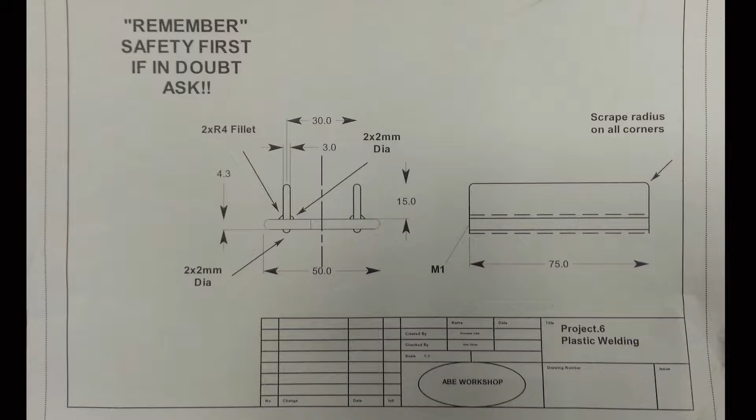Can you understand what I'm saying about reading the drawing? You understand what that 2 by 2 is? That 2 by 4? No? That is the type of welding rods we use.

In plastic welding, the welding rod is designated by the end section. Okay, now have a look at the end sections on that - there's a 2mm and a 4mm fillet. You can pass that around, have a look at that, and you'll see what I mean. What else does it say that we've got to be looking at?

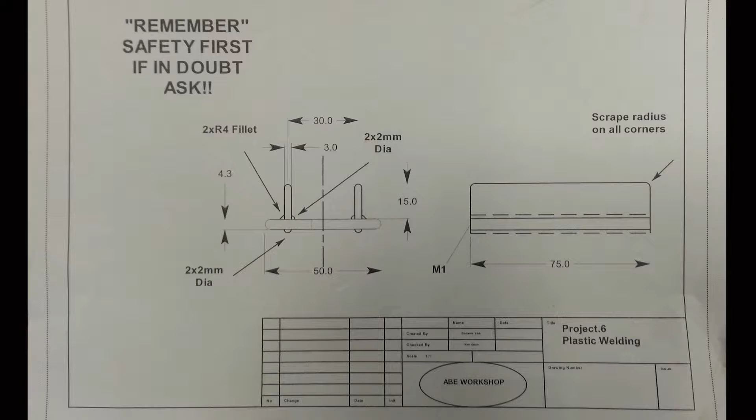Big black writing there - scrape radius corners. Did you just pick that up? Right, so what that means is we have to round all the corners on this material before we actually put it together. Now to do that, it's pretty simple.

All we need to do is use the edge of the rule. This is one time where we can use a tool for what it's not designed for, because this is hardened steel, that is soft plastic, it's not going to damage the rule. So just a scraping - just be careful that you do not get carried away by scraping in the centre, because you'll take too much off in the centre and not on the edges. Okay, just scrape both sides of it, make a nice little round there.

If you want to go a little bit further, you can use a little bit of wet and dry and give that a good sand up with your wet and dry.

Righto, there's another thing we've got to look for before we start. On the back of your plastic, on all plastics that you buy, it has a protective film. Please make sure you remove the plastic film before you start welding. That will be on both of them, on the little ribs, as well as your base plate. Looks like that's off that - yep, that's off.

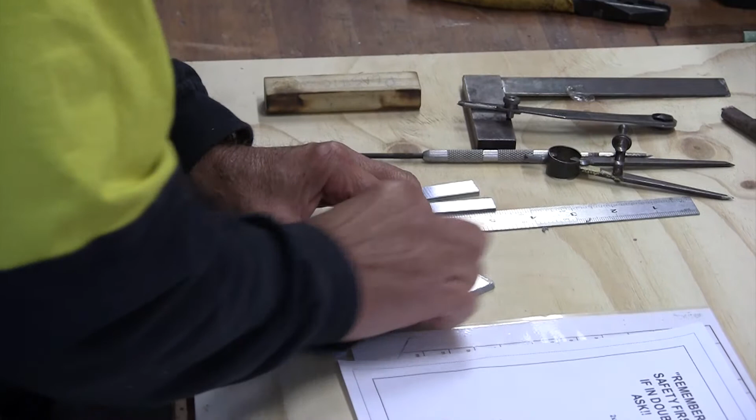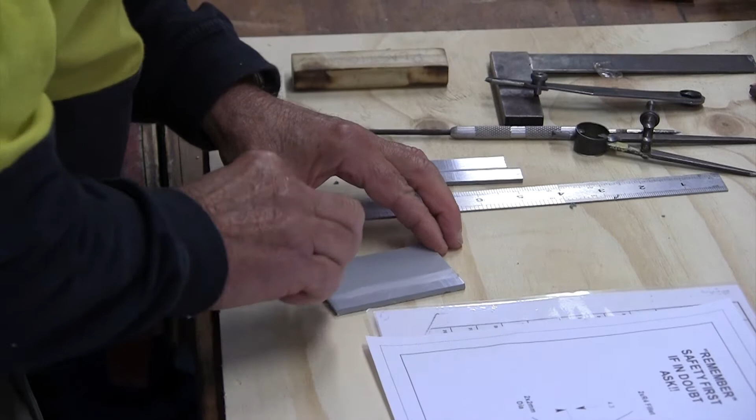Now, because there's a protective film on there, that will leave a little bit of grease - contaminant - on your surface. So where you're going to weld, just get a little bit of wet and dry paper and give that a bit of a clean up, on both sides. All right, we're ready with that?

Okay, now we'll just put that aside and I'll just go through the OH&S of our plastic welding. Righto, now do you remember your school days - the two different types of plastics? Yes? What were they? Thermoplastics and thermosetting. Yep. Your thermoplastics are like what? An example.

Your PVC, acrylics, polypropylenes, ABS - they're all what they call thermosoftening. Your thermosets are more like your Bakelite, your fiberglass resins. Once they're cured chemically, they just do not move anymore. But with your thermosoftening plastics, we can heat it, bend it, heat it, bend it. It has a memory.

Why can we do that? You remember from our chemistry days, the valency bonds with the atoms? It has a long chain valency bond, so that means with a small amount of heat we can bend it, reheat it, bend it back again.

And that enables us, with a small amount of heat, to fuse two bits of material together with a welding rod, so we don't need a great deal of heat like we do when stick welding. In stick welding, we're getting the temperature up to about a bit over 2,000 degrees C. With plastic welding, we're looking around about 350 degrees C. So that's the reason why we can plastic weld.

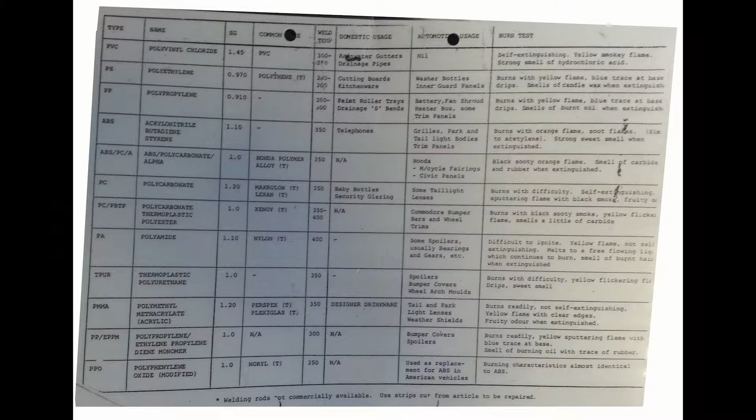So if you're unsure of your material, you can check what it is by a simple burn test. There are charts like this around that give you where the material is used, what the heat setting of your gun is, and what the burn test is on the side there. For an example, your PVC - when I burn it, it's self-extinguishing yellow smoky flame and a strong smell of hydrochloric acid.

We'll just do a little burn test here so I can show you. I've got a tray there with water in it, so if any drips, it's going to drip into the water. So the yellow flame, black smoke, self-extinguishing, and that does smell of hydrochloric acid. Did anybody get a whiff of that? No, well I don't really want you breathing it, but it's not good.

But you can do a burn test. Now if I wanted to do ABS, it burns with an orange flame, there's soot flakes that come off it. It's similar to the acetylene and has a strong sweet smell when it's extinguished. So you can do a burn test and that will tell you what type of plastic it is you're trying to weld.

Now in this industry, they use a lot of plastics on your motorbikes, fairings, in cars. How much percentage of a motor vehicle these days do you think is plastic? Yeah, that's a huge amount, probably 30-40%.

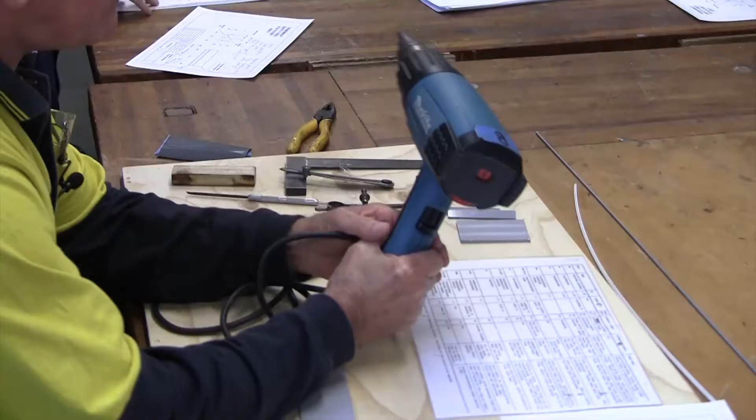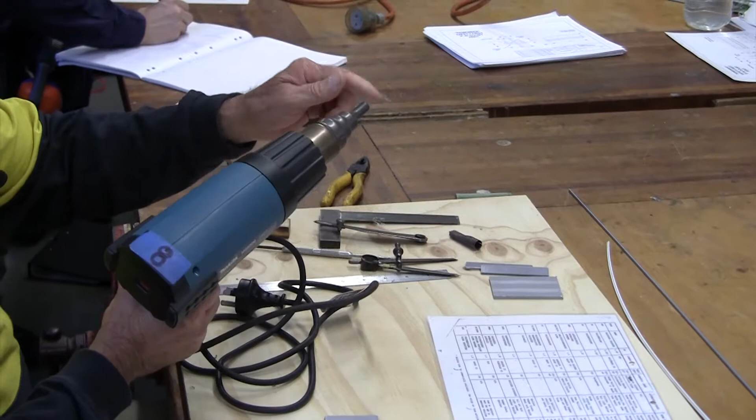Now the machine or tool that we use is a heat gun. Now what the heat gun is - it has an electric motor, a fan and a heating element. The electric motor drives the fan, which forces air over the heating element, then it comes through this restricting nozzle at the end of it. This will get up to about 600 degrees C when I put it on maximum.

We'll put it on about 350 degrees, which is number 8 setting. There is your on-off settings on the back there. We'll be putting it on number 2 - that's your speed of the fan. If I was working outside, I'd put it on a higher fan setting, but number 2 on the inside is fine.

Now, when it goes through the front section here, that gets extremely hot. If I was to put my hand on that, my hand would stick to it when it's hot.

Right, now I've gone through and explained the process and the machine we're using. What is the hazard of that tool? What other hazards have we? Electricity, excellent. What else? It's a bulky tool, it's like a big tool. Cumbersome, yeah.

Put it all down, this is all your OH&S of it. What else? The material that we're using - what happens if we get the wrong setting and we burn it? It's going to catch on fire, and then what's going to happen? Fumes.

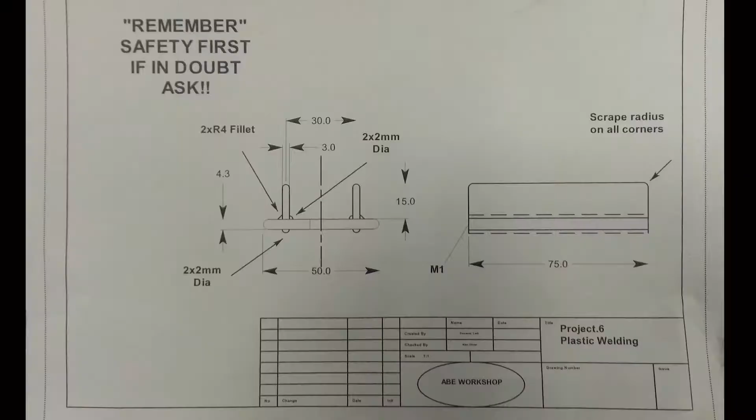What would be the first mark we'd put on that drawing? What would be the first measurement or mark? The centre line. Okay, centre line.

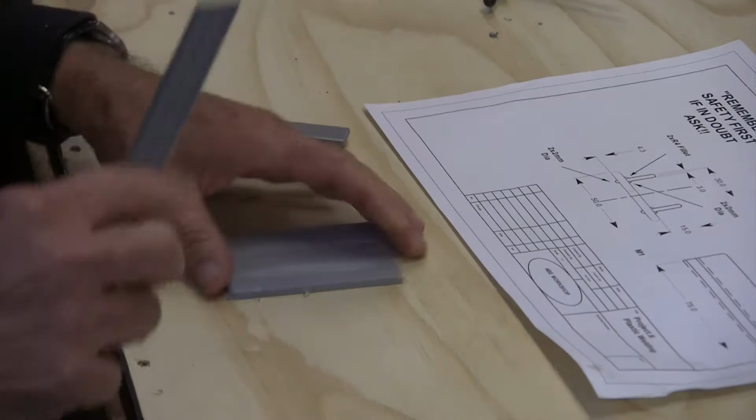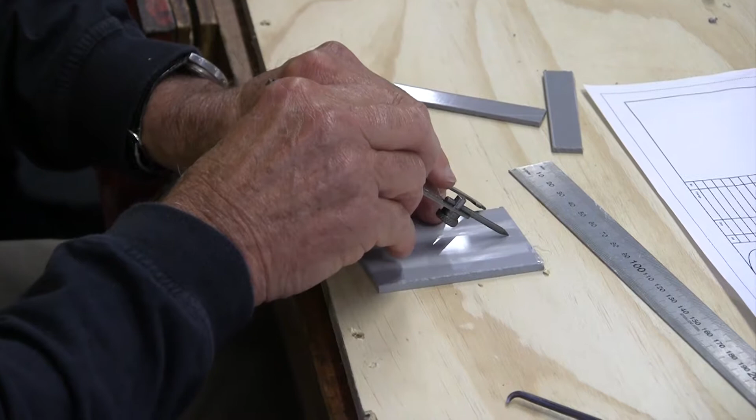You can do that one of two ways. We can use our rule, come in 25mm either side and mark, or we can set our jenny calipers up to 25mm, which I prefer. The reason I like these is straight away we've got to check - we know we're right. Turn it over both ways and you know you're right. Make sure you flip your job over and come back from the same side. Don't go the opposite side.

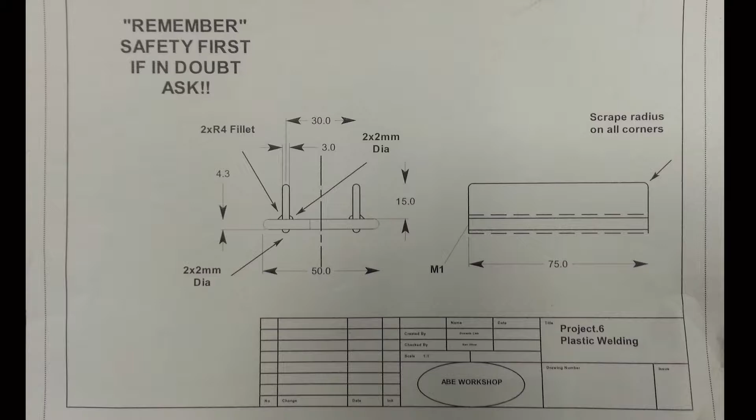All right, we've got two centre lines there. What's the next measurement we'd put on there? Where the two webs go. So what measurement would I put on the base plate? What measurement am I looking for? How much? 15. That would give us the centre of that web, wouldn't it?

So that's going to be very difficult to line up. Wouldn't it be better to come from the edge? Yes. So what measurement is that? It's a 3mm thing, so it'll be 16 and a half in the middle. 16 and a half? Or 13 and a half - depends which side you want to go. 13 and a half, yeah. I'd go 13 and a half on the inside.

Okay, you see how he's done that? You've got your centre line, you've got your 3mm webs, you take 1.5mm off each web, that makes it 27. Half of 27 is 13 and a half.

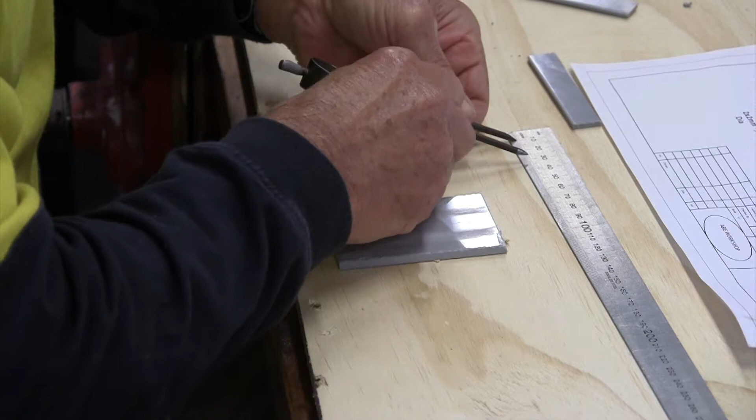So you set your dividers up to 13 and a half. What I do with that, I always double check - go over, flip over. 27. I know I'm right. So you can mark.

Come back down, mark the bottom. We can mark both sides.

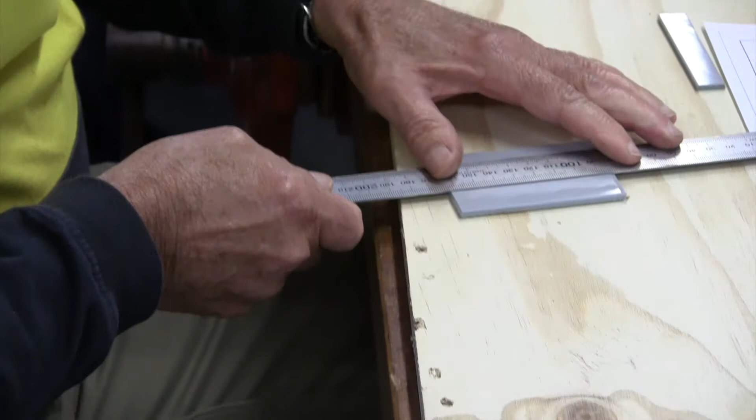Just remember our technique with our scriber - you always hold the scriber on just a little bit of an angle. Why is that? You know why? If you hold it upright, because of the shape of the scriber, it's on an incline. It's going to hit on the edge there, and you're not going to get the point of the scriber hitting right on the edge. You understand what I mean? Like that, it's going to go right on the edge. Up there, it's going to miss the edge of the rule.

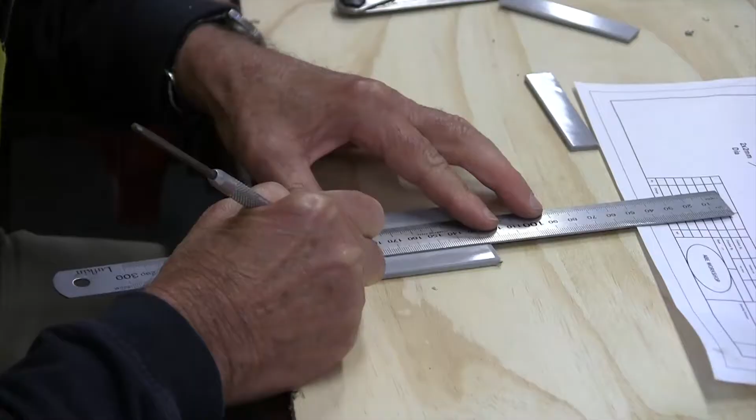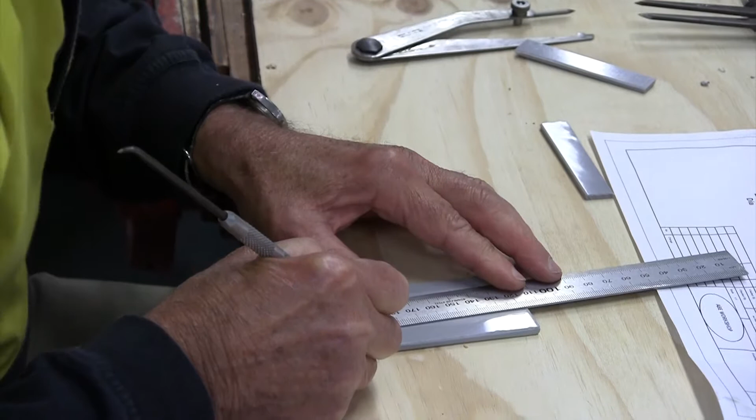Keep your fingers out the way. Okay, the other side. Okay, we've got that marked? Yep.

I'm ready to go. Ready to start welding? Seems like it. What did I do first before I started welding? What's one of the golden rules in the workshop? Measure twice, cut once. Check it.

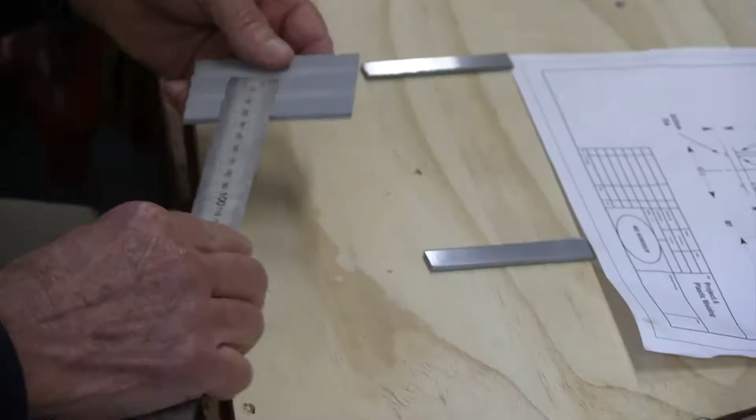Okay, we know - 25, 27. 25, 27. I know that's right.

Now what I have done, what you'll need to do, you'll need to have these little scrap pieces on either end, because when you're plastic welding, it's extremely difficult to start the weld off. I'll give you a demonstration in a minute, I'll show you why. So what we do...

That wasn't a mobile phone, was it? It's in the office here, is it?

Now what I've also got made up, we've got these little plastic welding jigs. They're made at 27 mil for you, so they'll fit on there.

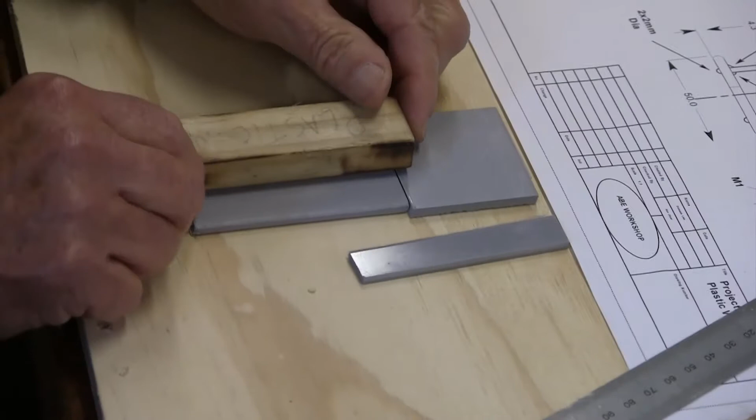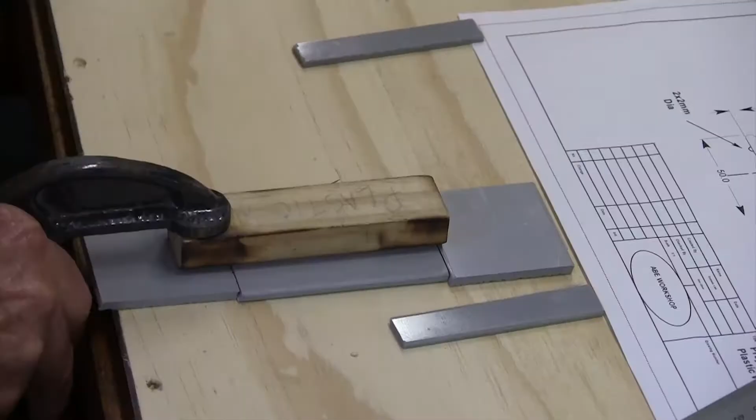And then we get our clamp. We can clamp it in place. We'll check it. And those little strips go on the edge like so.

Now it's going to be impossible to hold that, hold our rod, hold our gun and do it all in one go. So what we do...

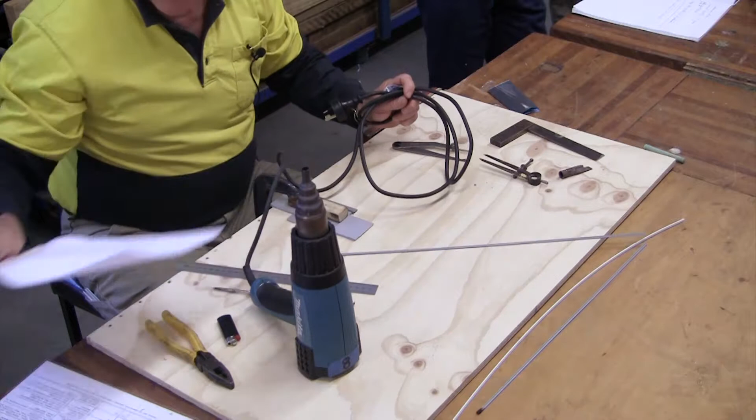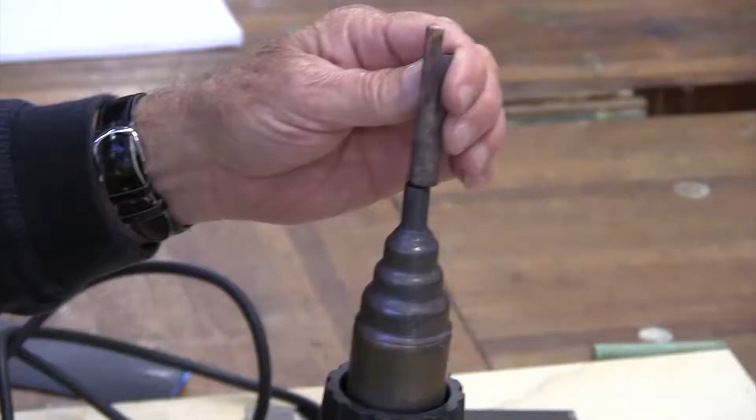Just move this out the way. We have what we call a tacking tip. These sit on the gun, like so. When you look at your gun, that straight section is in line with your eye. Can you understand that? Yep. Okay, that's got to fit in there like that.

Don't pick it up because it's going to be hot, it's going to be used. When you're here, people are going to be coming and going all the time. That will be hot - make sure you use pliers. And when you finish with it, what do you do? Because you're going to have to take it off and it's going to be hot. Finish with it. Remember the heat box?

Hot. You can even time it if you want to. Because, as I say, people are going to be coming and going.

What's another method we can use to make sure people don't touch it? Put a sticker on it or something? Yeah, we've done that. Communication - guys, that's hot, do not touch it.

How do you check something if it's hot? You put a bit of paper next to it and see if it burns? Possibly. Okay, back of your hand.

Back of your hand. You'll feel that heat come off. Not the front of your hand, because you lose a lot of your sensitivity - that's the part of your hand you're using. The back of your hand is more sensitive. You put your hand there and you'll actually feel the heat coming off without touching it.

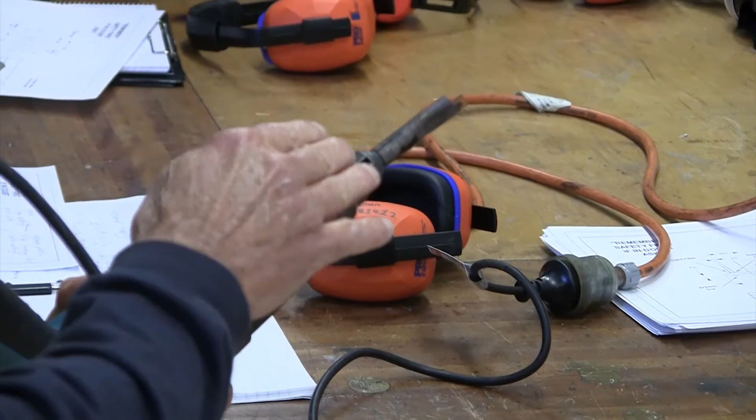Now you have to be careful with this gun. There is not only heat coming out of there, there is heat coming out of the restriction nozzle. We have to do that because it will have too much back pressure in the gun and damage it if we don't have that heat coming out of that restriction nozzle - it's just releasing the pressure a little bit. So be careful, there's heat coming out there as well as the top.

Now the technique - this is only a tacking tool. There's no mechanical strength to this at all. All it's designed for is an aid, only holding the material in place while we're welding. It's only an aid. So what I'll do: line it up, keep my fingers out the way.

I'll do a little tack on the end. Try to come across onto your sacrificial piece because it'll help hold it there. You can see I'm using another tool just to hold it in place so I don't burn myself. And that's tacked.

The same on the other side - little tack on the end. And you see the technique - that was at 45 degrees. Okay, just slowly along. Not at 90 degrees, at 45 degrees.

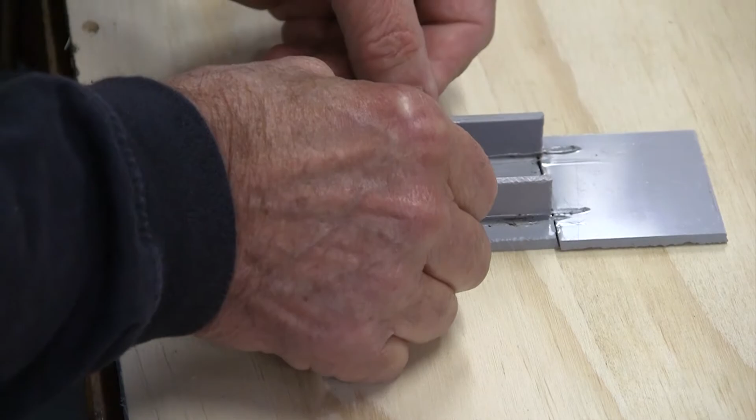Right, now that's just held it. As I say, there's no strength to that at all. Take our tacking tip off.

Put in our heat box. Our spacer goes back in there to hold it. And then we can clamp back onto our spacer, like so. Now before I start, I like to do a little test run just to make sure I've got the right heat setting.

Now with your fillet rod - the fillet rod is shaped like so, it's like a triangle. So that triangle is designed to fit in there like so. You with me with that? So that triangle fits in there like so.

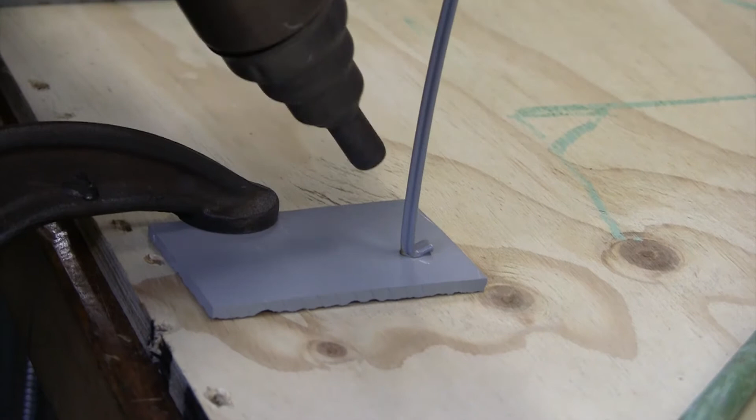I'm preheating as I'm going along. See how it's very difficult to start off? You'll see that little bit of a wave in the front. About a kilo of pressure, but I'm putting quite a bit of pressure on that. When you have a look, you'll see a little wave on the front and a little wave either side. Now that started to burn there, so I'll just move the gun away.

Now your PVC plastic is the hardest one to weld with because it burns. The other plastics won't burn, they'll only plasticize. So your technique is critical when you're welding PVC.

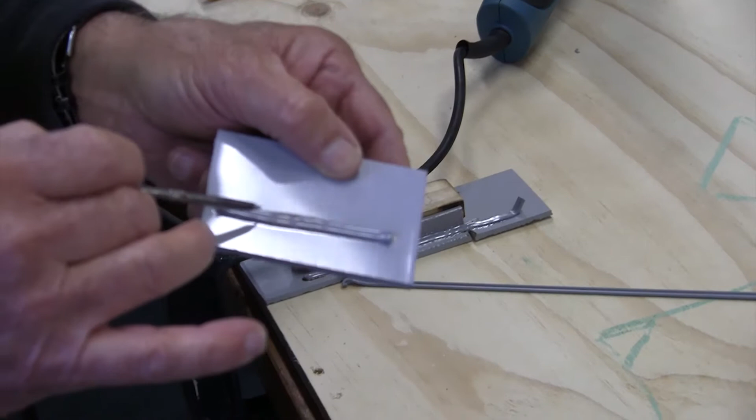Now when you look, you'll just see a little bit of a bow wave there and there. Now you see the burn marks? They're not a problem. The problem is if you have to weld over that. It becomes like an inclusion, like slag in a stick weld. So what you'll have to do, when that cools, you scrape that away, same as you scrape the slag away on a stick weld. Exactly the same. So that's got to be scraped away before you've got to weld over it again.

You never ever cool your plastic in water, because you'll affect the physical strength of it. You must let it cool naturally. You can use air to cool it, but never water, because it's hygroscopic and it'll absorb moisture, and it'll affect your properties of your material.

Alright, so now we're ready to start welding on our job. You can cut that scrap piece off there if you want to. Always make sure you hold it down, because if you hold it out, that scrap piece can fly off. So hold it down towards your bench, use your pliers, cut it off.

Right, now just preheat your tip just a little bit. I don't have to preheat my parent material because I've already done that by tacking it. Pendulum motion. Downward pressure. Now the book says about 1 kilo downward pressure. How you'd work that out, I'd never know. But I'm putting quite a bit of pressure on that. You'll see in the front of this weld there's like a little bow wave.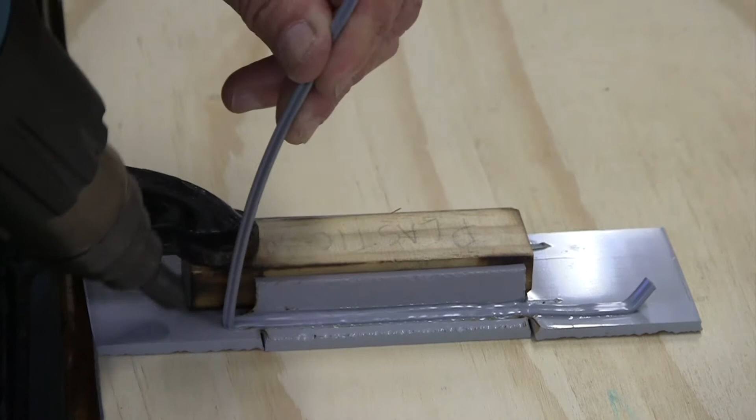Okay, when I finish, let it cool for a second, give it a twist. Preheat your tip.

Ready to start welding. Pendulum motion, 60-40, downward pressure. The rod's at 90 degrees. I'm getting the bow wave. I now come over to my workpiece and the rod then goes to 45 degrees. Slight burn there, so I'll move the gun away.

Take the rod off onto our sacrificial piece. Let it cool for a couple of seconds and just give it a twist.

Now, remember me telling you about the plastics, how you heat it up and they plasticise. That's one of the disadvantages with your plastic welding. Look how that's plasticised. If I was to bend that over there like that and let it cool, it'd stay like it.

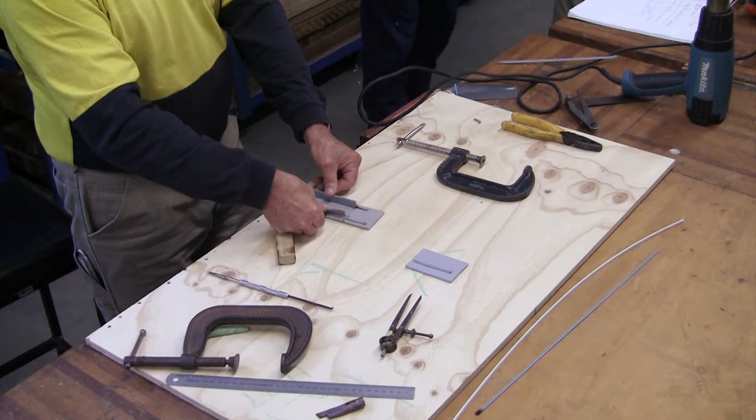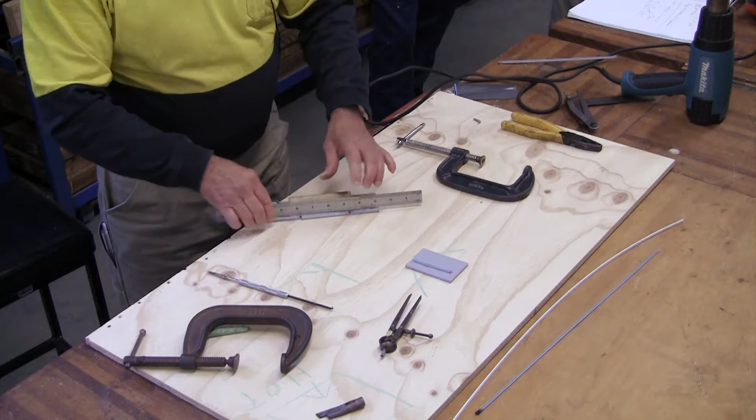So technically, every time you do a weld in plastic welding, you should let it cool before you do your next weld. But we haven't got enough time to do that. So what you can do, you can just hold the ruler against the side of it, let it cool a little bit, but don't quench it in water. So that's one of the big problems with your plastic welding, plasticizing.

And the next one is the 2mm. What do I do with that before I start welding? Cut it in half. Now this is a lot smaller rod, so it's going to plasticise a lot quicker. So you'll have to be just a little bit quicker with your welding.

Once again, it's up at 90 degrees. I'm getting the bow wave. I get to my workpiece, over at 45 degrees.

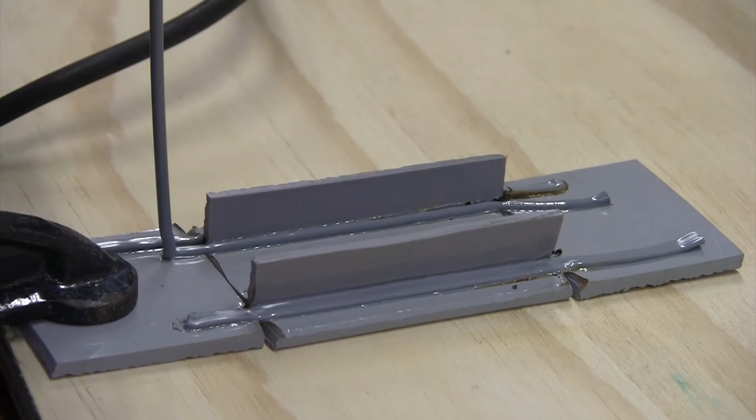Now remember at the start, I said this is a test. In reading the drawing, you'll be surprised the amount of students that will put the wrong weld on the wrong side by not reading the drawing. So make sure you follow what the drawing says.

Downward pressure. It's at 90 degrees. I've got the bow wave. When I get to my workpiece, over at 45 degrees.

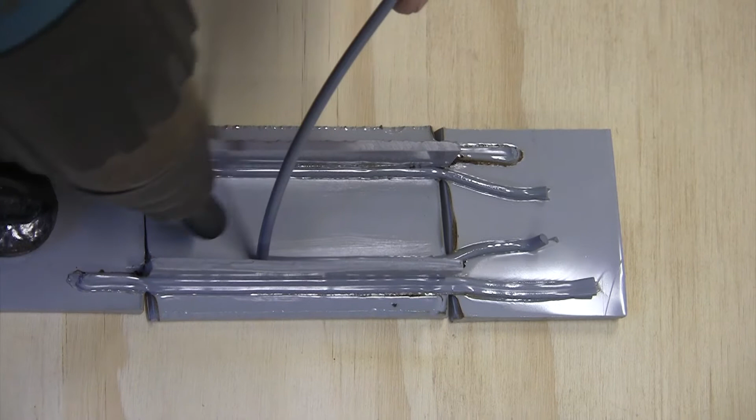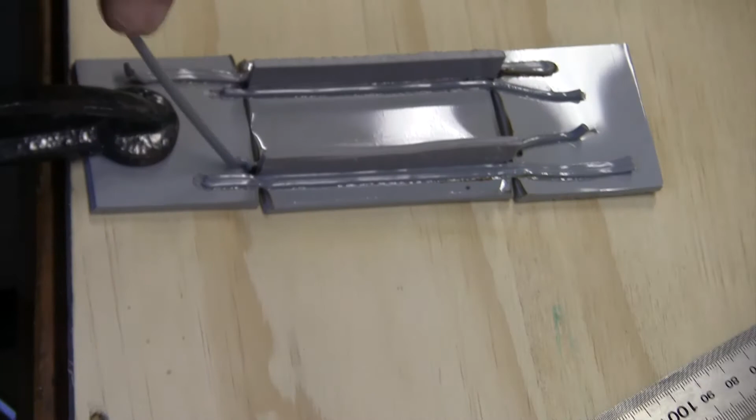I'll just make a little mistake here, just so I can show you. Now what I've done, I've taken the heat away. And if you can see in there, there's no bow wave. There's a bow wave all the way along there, but no bow wave here. That would be a failure.

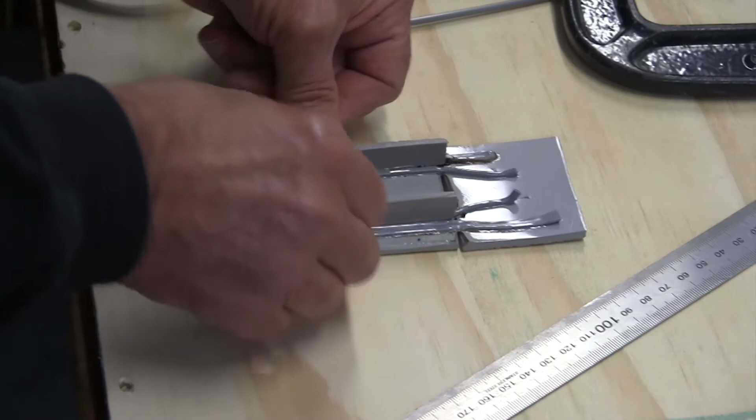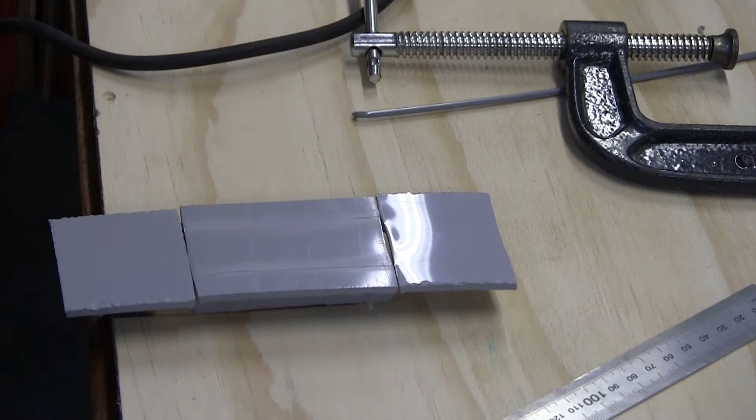Once again, that's all plasticized. Technically, we should let that cool and then do the back welding, because it's going to get too much heat in there. And as soon as it starts getting too much heat, what's going to happen? It's going to burn, isn't it? We're getting close to its combustion temperature.

Do not clamp your job when it's soft, because what's going to happen, it's going to put a dent in there, isn't it, because it's plasticized. That's why we clamp on our sacrificial piece.

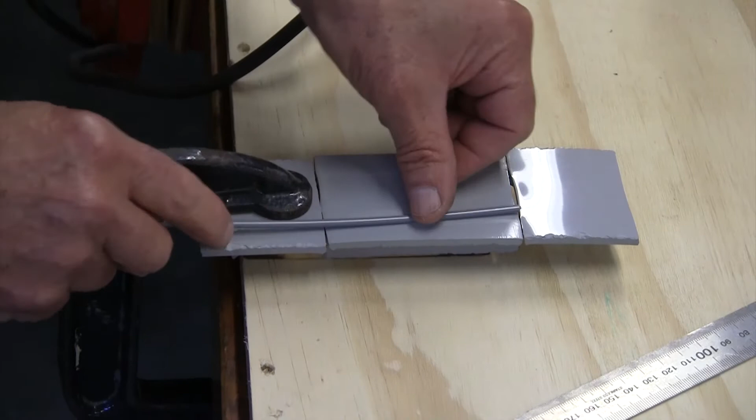Got to prepare our welding rod, cut the worst piece off the bottom of it. Right, now one other thing I want to tell you. When you're welding, that length of your job is exactly the amount of welding rod you're going to use. Okay? You don't cut it off to that length, do you? Because by the time you get to the end, you're going to burn the tips of your fingers off.

If we don't have the correct technique, we stretch it when we're welding. Remember I told you it has a memory, it's going to want to shrink back, and it's going to break and put undue tension into your workpiece. Right, I'll do one correctly, then I'll do one where I stretch it, and you'll see what I mean. I'll do this one correctly.

This one's at 90 degrees all the way. We don't turn this one over at 45 degrees. Now you can see how that's starting to get a bit hot. See how it's starting to burn?

Come off onto your sacrificial piece. Give it a twist. Now this is what happens if you don't have the correct technique and you start stretching your rod.

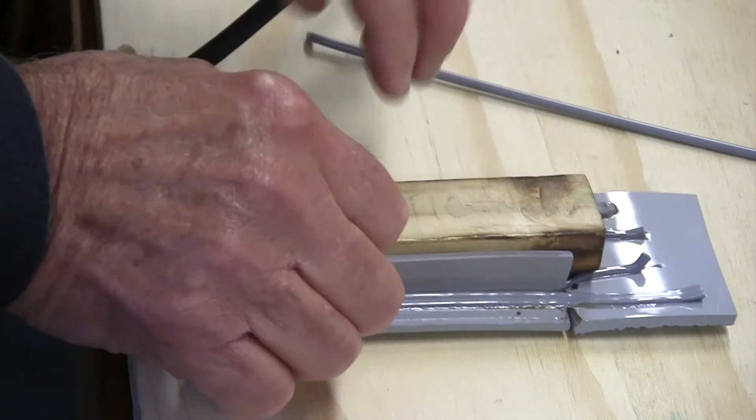Now see that's plasticized, see how it's all plasticized? So what you do, okay, leave your little template in there, your little jig, let it cool, then it'll stay in that shape. Okay, when you finish, you can hold them in the vise and cut your sacrificial pieces off with a hacksaw. Any questions on that?

Right, now one other thing I want you to remember. When you are finished with your welding gun, do not turn it off - I want you to turn it down to 0 and let it cool down. Okay? Because if you turn it off straight away, you haven't got air blowing over your heating elements. The little round wires in there are going to contract too quickly and they can break.

So let it cool down. It'll never get 100% cool, okay, it'll never get 100%. It'll take about 3 or 4 minutes for it to cool, and then you can turn it off.

When we finish, our housekeeping - make sure we pack everything up, get rid of all the scrap pieces, because they are flammable, put them in a rubbish bin. Tell people around you that the gun is on, that your tacking tip is hot. And that's it, okay? Any questions on that?

No? Just remember, the exercise is reading the drawing. Make sure you get the right thickness material, the right type of rods, okay, because that's what we'll be marking you on.